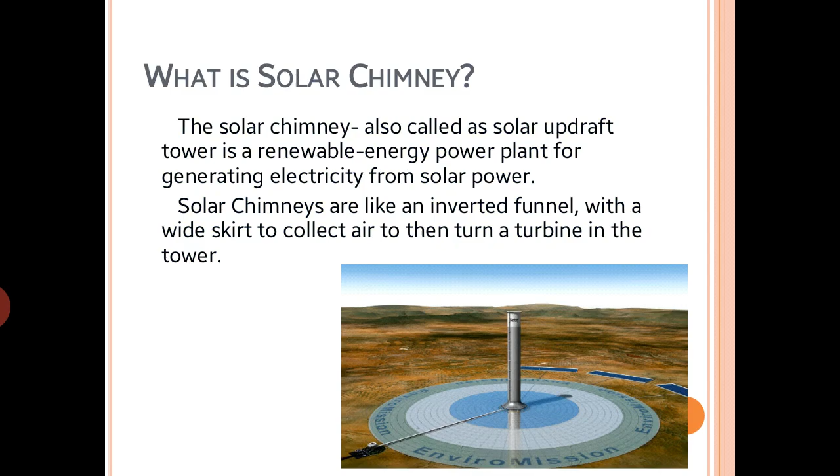What is solar chimney? The solar chimney is also called thermal chimney or solar updraft tower, which is a renewable energy power plant for generating electricity from solar power. The main function of the solar chimney is to convert solar energy into electrical energy. Solar chimneys are like an inverted funnel with a wide skirt to collect air and then turn a turbine in the tower. So the principle of operation: it consists of collector, tower, and turbines.

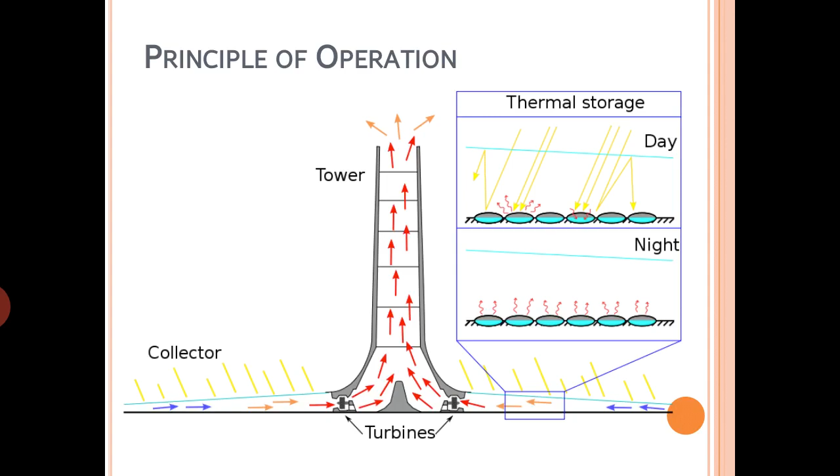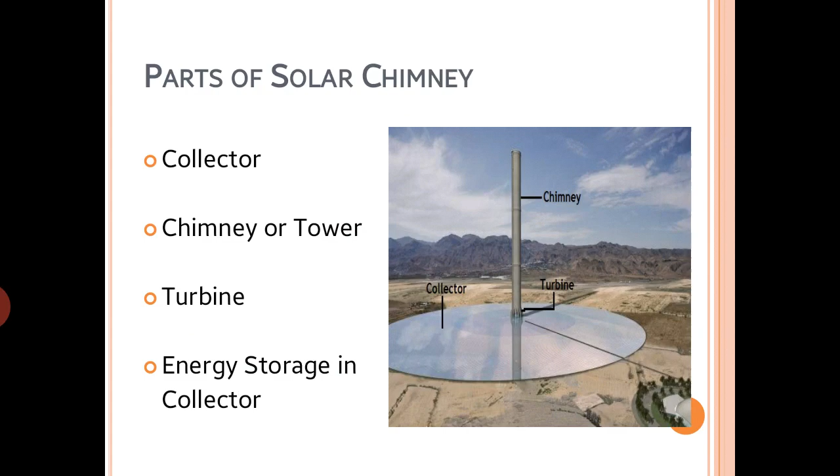The solar updraft tower is a design concept for a renewable energy power plant for generating electricity from low temperature solar heat. Sunshine heats the air beneath a very wide greenhouse-like roofed collector structure surrounding the central base of a very tall chimney tower. The resulting convection causes a hot air updraft in the tower by the chimney effect. This airflow drives the wind turbine placed in the chimney updraft or around the chimney base to produce electricity.

So there are four parts of the solar chimney: collector, chimney or tower, turbine, and energy storage in the collector. So first is the collector.

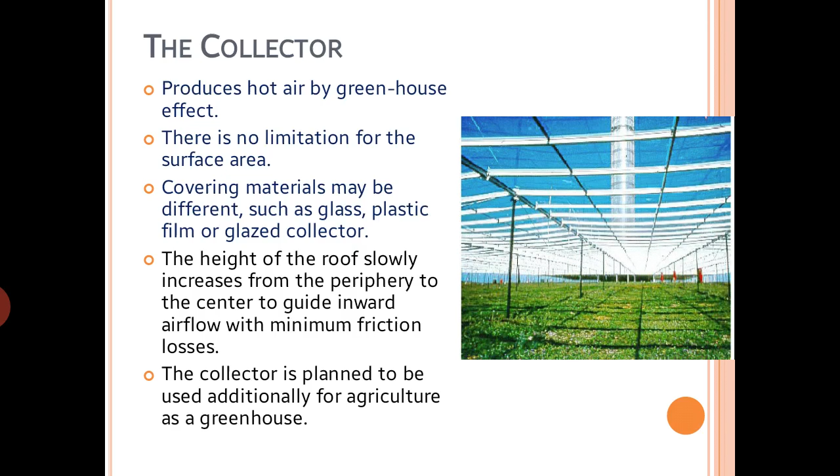Hot air for the solar tower is produced by greenhouse effect. The collector consists of glass or plastic glazing stretched horizontally several meters above the ground. The height of the glazing increases adjacent to the tower base so that the air is diverted to vertical movement with minimum friction loss. This glazing admits the solar radiation component and retains long wave re-radiation from the heated ground. Thus the ground under the roof heats up and transfers its heat to the air flowing radially above it from the outside to the tower.

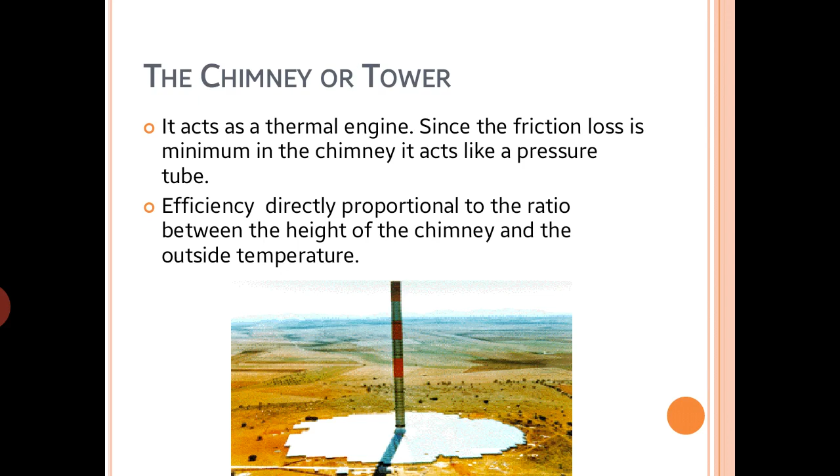Next is the chimney or the tower. It acts as a thermal engine. Since the friction loss is minimum in the chimney, it acts like a pressure tube, and the efficiency is directly proportional to the ratio between the height of the chimney and the outside temperature.

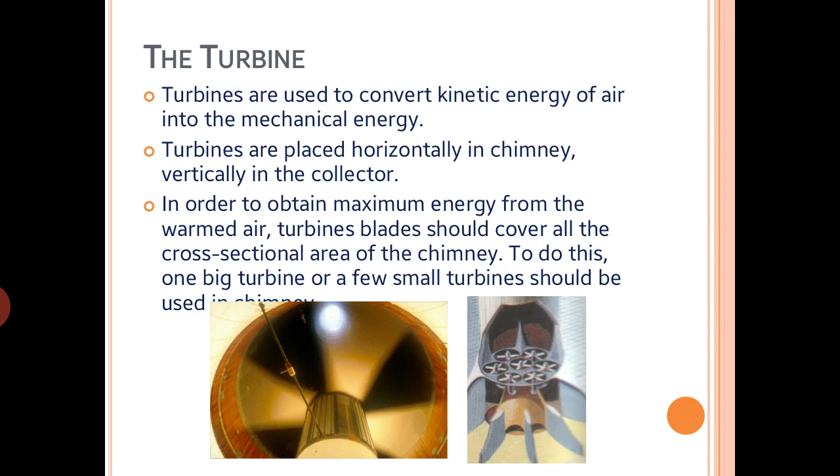And next is the turbine. The turbines are used to convert kinetic energy of air into mechanical energy. Turbines are placed horizontally in the chimney and vertically in the collector. In order to obtain maximum energy from the warmed air, turbine blades should cover all the cross-sectional areas of the chimney. To do this, one big turbine or a few small turbines should be used in the chimney.

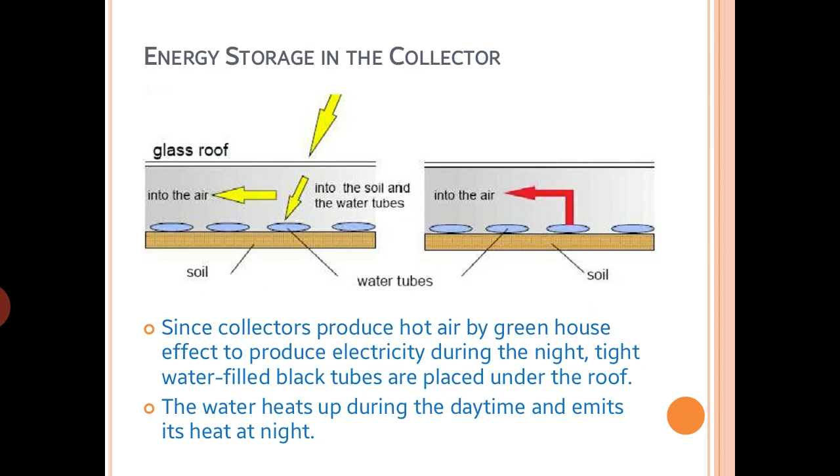And next is energy storage in the collector. Since the collector produces hot air by greenhouse effect, to produce electricity during the night, tight water-filled black tubes are placed under the roof. The water heats up during the daytime and emits its heat at night time.

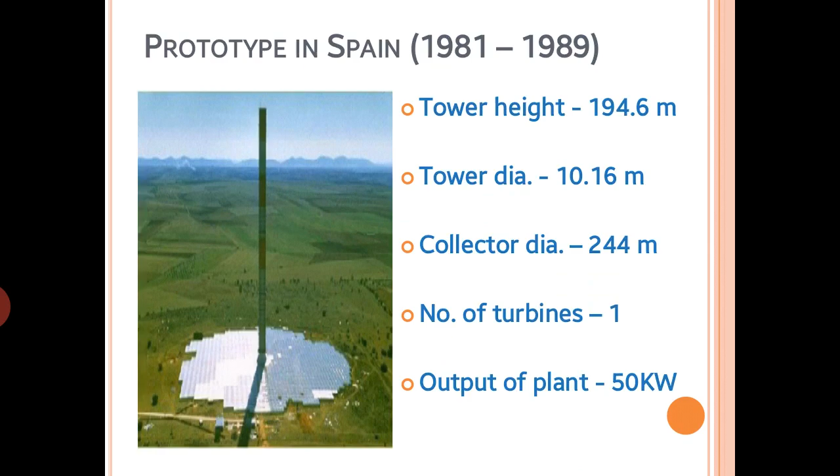So this is a prototype in Spain. Its tower height is 194.6 meters, and the diameter of the tower is 10.16 meters, and the diameter of the collector is 244 meters, and the number of turbines used is 1. The output of the plant is 50 kilowatts.

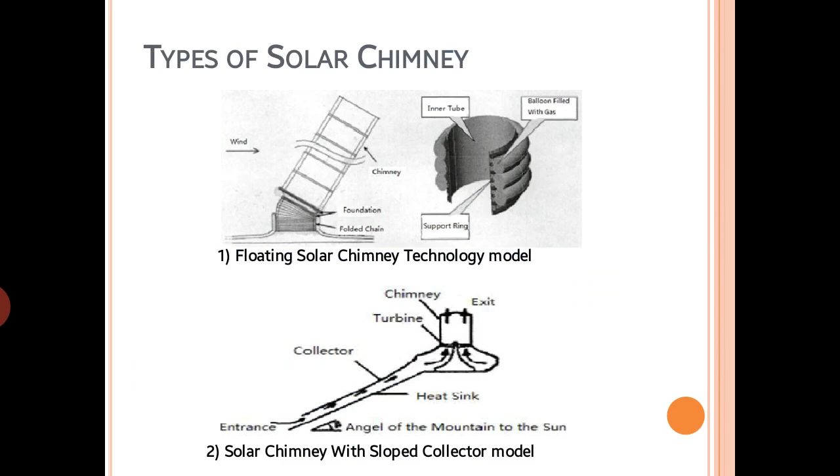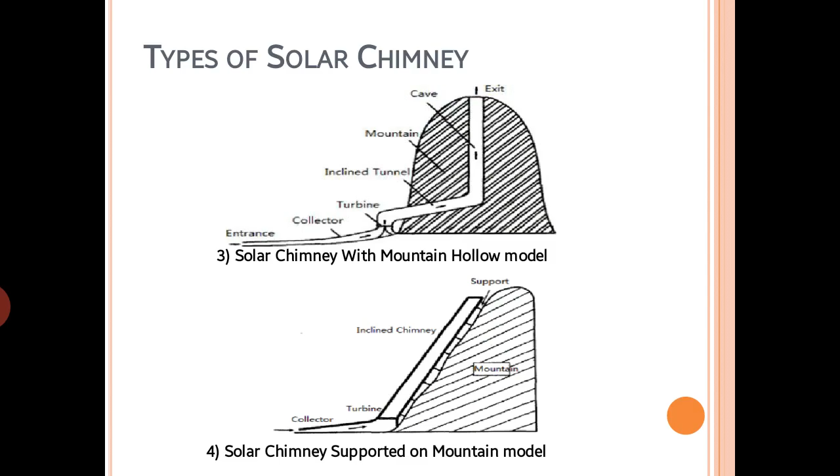So there are four types of solar chimney. The first one is the floating solar chimney, and the model is here. The second one is the solar chimney with sloped collector model, the third is the solar chimney with mountain hollow model, and the fourth is the solar chimney supported on mountain model.

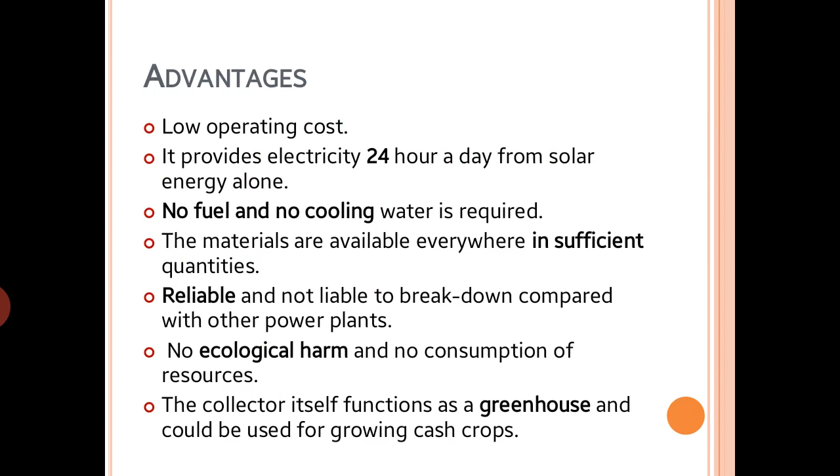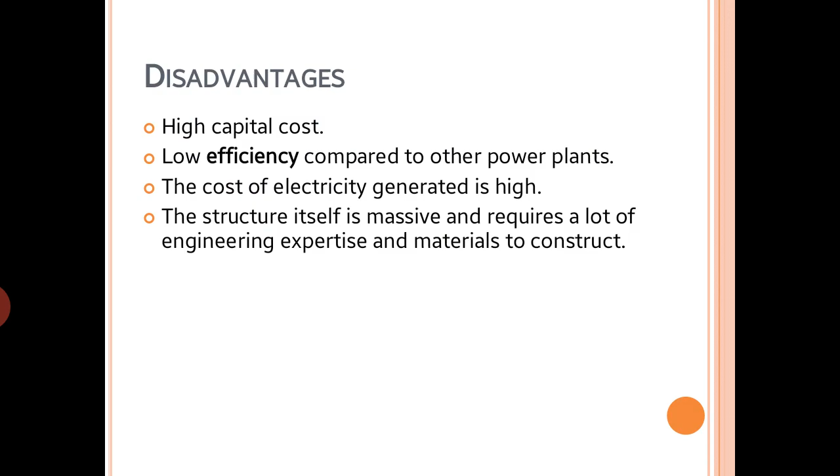So now the advantages of the solar chimney: it has a low operating cost, and it provides electricity 24 hours a day from solar energy alone. No fuel and no cooling water is required. The materials are available everywhere in sufficient quantities, reliable and not liable to break down compared with other power plants. No ecological harm and no consumption of resources. The collector itself functions as a greenhouse and could be used for growing cash crops.

Disadvantages: high capital cost, low efficiency compared to other power plants. The cost of electricity generated is high. The structure itself is massive and requires a lot of engineering expertise and materials to construct.